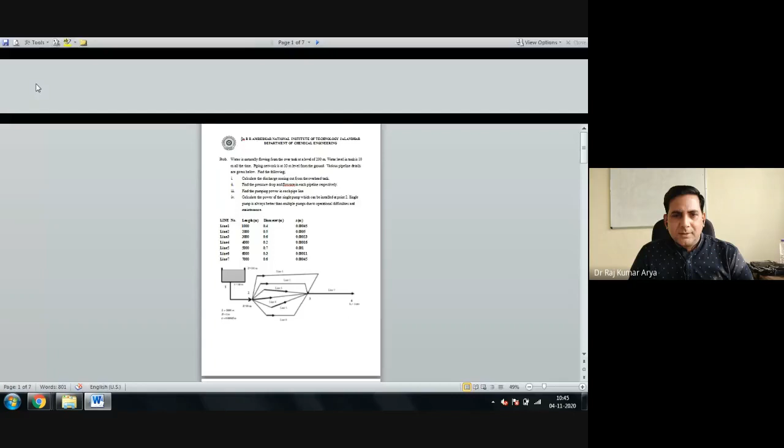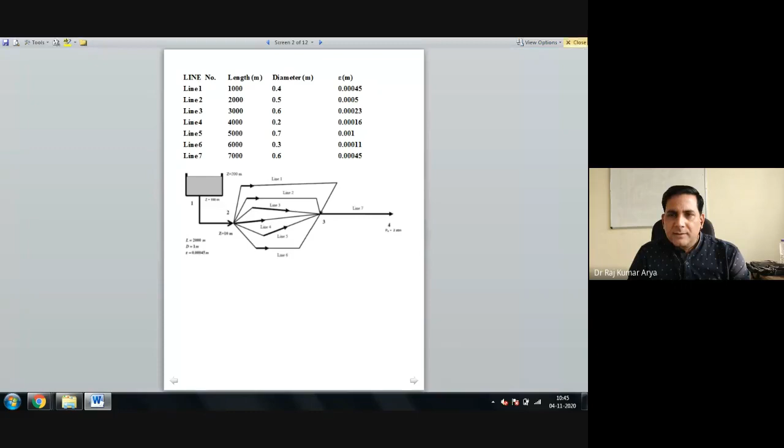Let me zoom it. So you have a similar problem as you did previously. Can we write the equation for that?

You wrote previously your Bernoulli equations for your previous problem, yes or no? Yes, sir. Can we write similar equations? First you should understand what it is.

It is practically your overhead tank, which is there in all municipalities, all townships, or all residential complexes, where you have a large number of houses, to avoid the pumping power. So what do you do? You have one central pump, and from there you pump the water, hold it, and store the water in the overhead tank.

And whenever you want to discharge it, you just open the valve somewhere here and there, and it will flow into the entire locality, right? So that's called a gravity distribution. So automatically, in this way, you are decreasing your pumping power only. You need not run the pump throughout the day. You just fill up the tank and then you can rest for some time.

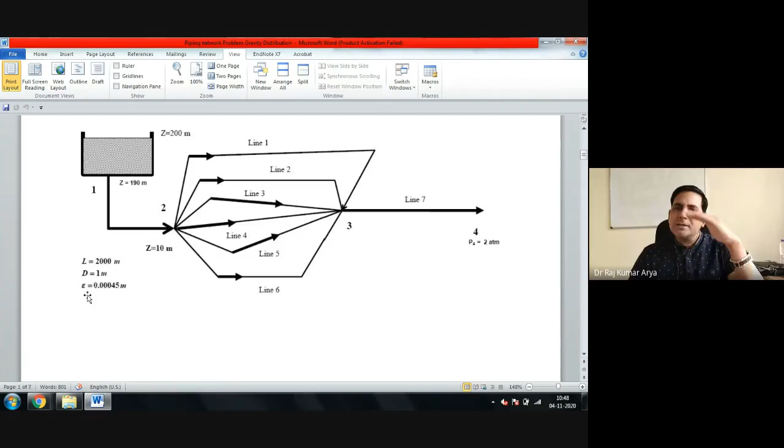Roughness of the pipe is epsilon, the roughness of the pipe, because each material has some sort of roughness. So the roughness is calculated in terms of height. So roughness is given to you, for each pipe.

These are the details of each pipeline: line 1, line 2, line 3, line 4, line 5, line 6, line 7. And these are the corresponding lengths of the pipes in meters. Diameters are given, roughness is given, because pipe materials are different or some may get corroded over time. These are the existing roughness values of the pipes.

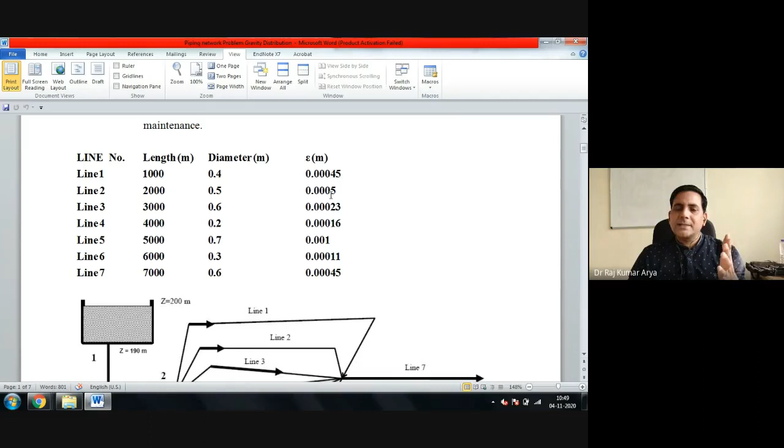Excuse me sir, what exactly is the roughness of the pipe? Roughness means - as you might have seen a pipe, outside you will find a very smooth surface, yes or no? Inside - yes sir, if you put a finger, you will find it rough.

Pipes are constructed using blowing or casting techniques. Inside, most of the time we don't care much, or sometimes we make the inside smooth - just like the cylinder or combustion chamber of your bike or vehicle, the inside is also smooth, right? Because if it were rough, your piston would not move, correct? Yes, but sir...

Even if you can keep on filing it, making it smooth and smooth, there is some extent beyond which you cannot smoothen it further. Any object, if you want to make it smooth more and more, after some time you cannot do it.

If you see with the microscope properly, you will see the surface is not 100% flat. It has some zigzag shape. Some roughness you can see with naked eyes, some only with the help of an electron microscope. You cannot see it from the naked eye or by touching with hands. That wavy nature, how much height is there vertically up and down, that is called the roughness actually. It is measured in terms of meters, centimeters or mm.

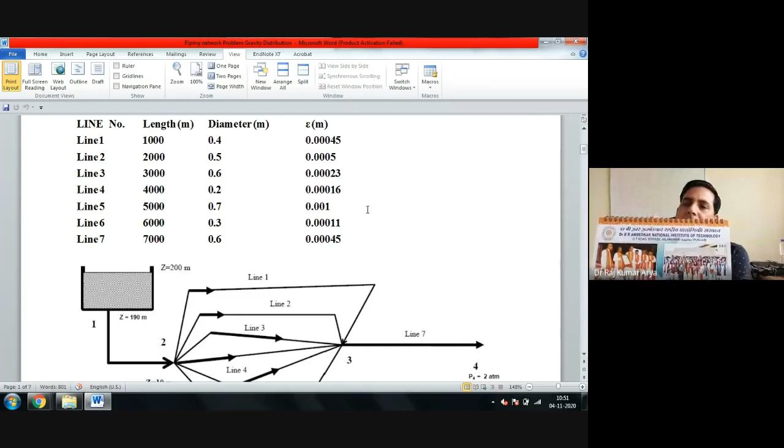So same type of thing would be there on the surface also, not in this exact pattern, maybe a different pattern. So all particles, some may be slightly up, some may be down, because that is a design problem. Sir, the roughness is there for the resistance of the water flowing through it. Yeah, I am coming to that only.

So roughness is practically unwanted. In case of flowing of the fluid, we don't want it. Just like your body, you want to move your hand freely. If your hand is rough, you cannot move it freely. Unnecessarily you are putting more energy. Yes or no? Yes, sir.

So to decrease the roughness, what do you do? You put oil, you put balm, you put cream. So the roughness of the surface, you have just covered it with the help of oil or a film, so that it has become smooth now. So in case of flowing of fluid, practically roughness is unwanted. You are not interested in that, because somehow that is not in your hands.

You cannot go beyond that particular limit. You can do filing, you can do sandpaper, but unnecessarily you are putting more power, more resources just to make it smooth. However, if you calculate in the long run, the manufacturing cost of that smooth pipe would be more as compared to my pumping cost.

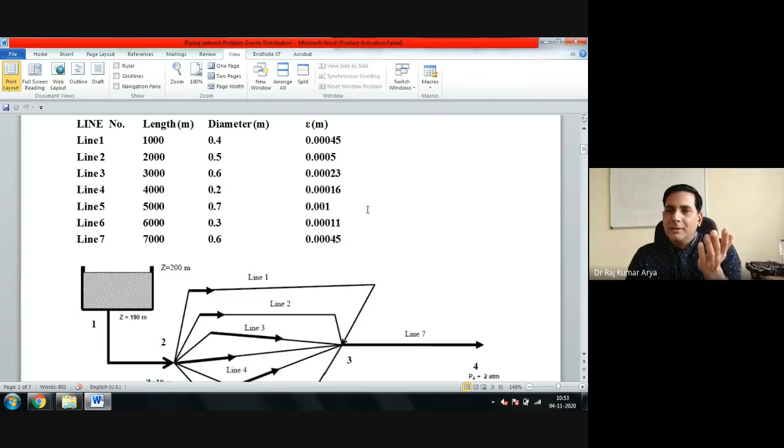So the roughness is practically unwanted in case of flowing of fluid. But in case of heat transfer, it is wanted because it will create turbulence. Turbulence means better mixing. So from a chemical engineering, reaction engineering, mass transfer or heat transfer point of view, you want roughness, you want turbulence, more and more mixing.

But in case of fluid flow, you are not interested in that, because your pumping cost will go up as you get more losses. It will create obstruction to the flow of the fluid, and finally your pumping power, some part of that power would be consumed just to overcome those obstructions. Okay, is that fine now?

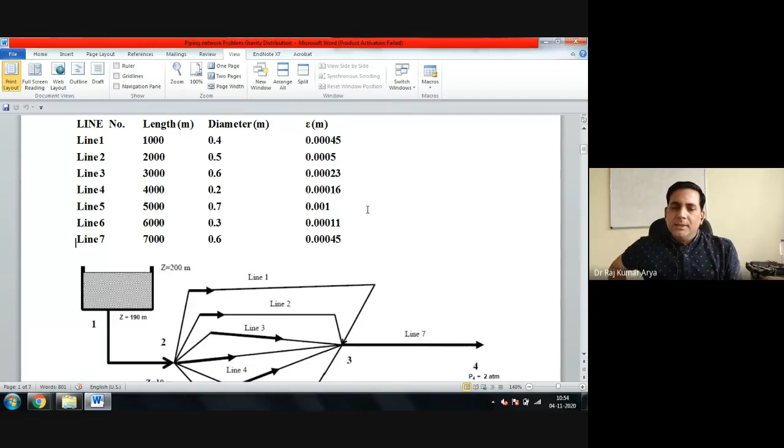Yes sir. Right, now you have these many pipelines, so can we write Bernoulli equations for all of these pipelines? One of the pipelines is from point 1 to point 2. This is one section having length 2000 meters, diameter 1 meter, and you have the roughness. So here you will have some friction losses.

Previously in the previous problem, you had neglected the friction losses. Here you would have it because now the pipes are rough. So one equation for that, because in the previous one you had not considered your minor losses, you had not considered your major losses. You had just considered the Bernoulli equation, an ideal condition. Here we are talking slightly non-ideal, so we will consider the loss term also.

Now, then you have pipeline 1, so you can write another equation for line 1, another equation for line 2, another equation for line 3, another equation for line 4, line 5, line 6. So we can write 6 Bernoulli equations, or 6 energy equations, for line 1, line 2, line 3, line 4, line 5, line 6. We can write that. Yes sir, right?

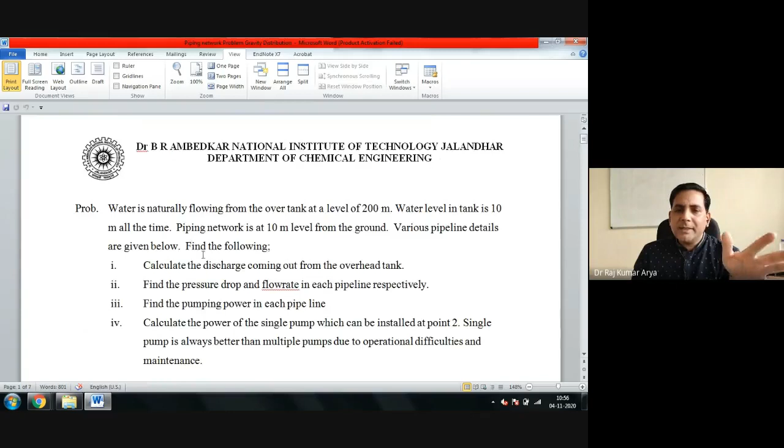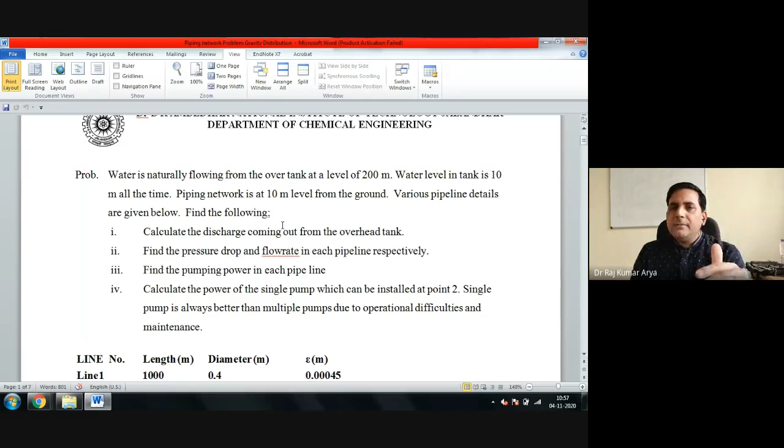Various pipeline details are given to you. You are supposed to calculate the discharge coming out from the overhead tank first. So what should be the discharge from the overhead tank? Is there any way that I can calculate the discharge from the overhead tank, how much flow rate is coming from this particular tank? Any means we can use to calculate it?

Or, what should be the maximum possible discharge for this particular flow? Finally everything is going to this particular end, right? So what could be the maximum discharge? Can we calculate it somehow?

So we can apply Bernoulli's equation at point 1 and 2 to find the value of V2, and then we can apply the formula Q equals A into V2 to find out the maximum discharge. That is the maximum theoretical possible discharge. Okay, we can do that.

We can apply the energy equation at a point. You just take the free surface here, at this particular point, and one at point number 4, neglecting all the losses.

So can we quickly calculate that, what would come here? Let's write the energy equation: P1 upon rho g plus V1 square upon 2g plus Z1 equals P2 upon rho g plus V2 square upon 2g plus Z2, plus the losses, FL upon D V square upon 2g for straight pipe. In case of fitting, this FL upon D would be changed by K, the fitting loss coefficient. In case of pipe, it remains as it is.

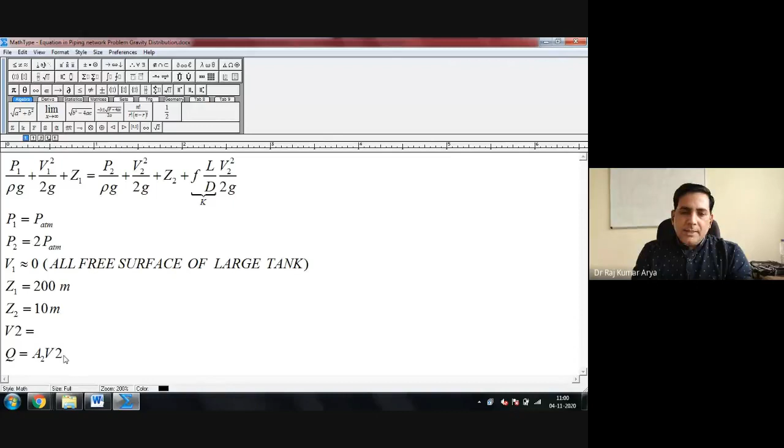Yes sir. Right, so this way you can calculate your maximum flow rate. This will become clear for everyone?

Can you quickly substitute the value and get the answer? Now, the question is: from where will this FL upon D V square upon 2G term come? So what can we do for this?

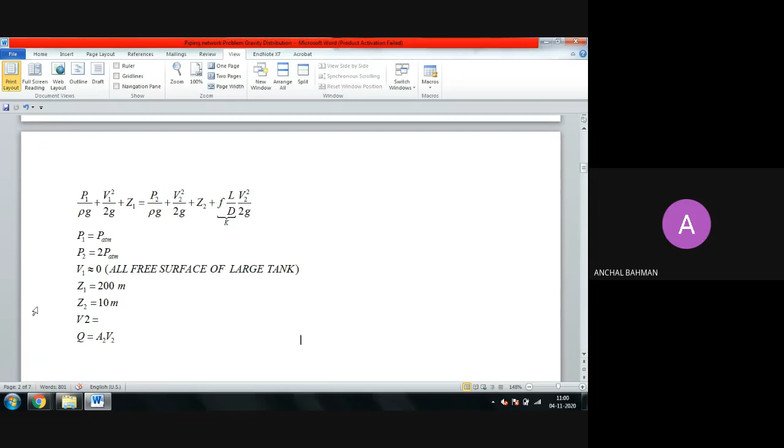Sir, if we are finding the maximum discharge, then in this case we'll neglect it. We will neglect it, so you will get the maximum value of flow rate. We can say there are no head losses in this case, so this is just a program here.

If you just calculate here, I get this value as 20 meter cube per second. This is my theoretical value. This is my maximum theoretical value.

If you substitute the values in all of this, this term is zero, and P1 is P atmosphere. So if you calculate and substitute here, you will get the maximum value of Q. That is the maximum discharge. The actual one we have to calculate separately.

Now, can we write equations for each pipe? One for point 1 to point 2, then for the entire pipeline. Can all of you write the equations for all these pipelines? Yes sir, so write them up. I can also show you what should come.

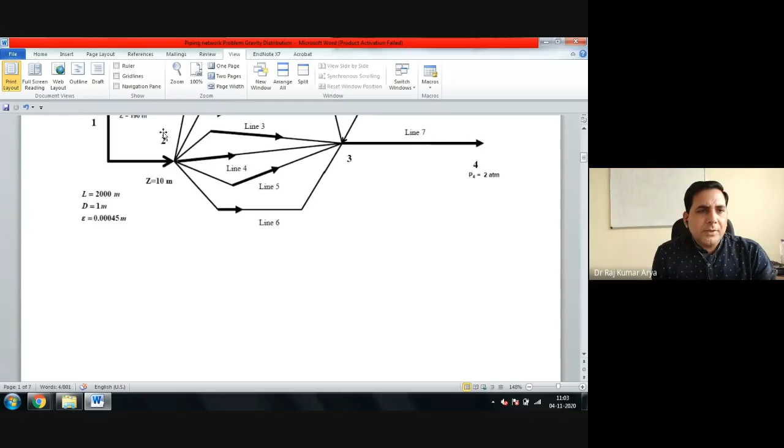I don't have that handwritten thing here. So what would be for the first one if we want to write it here? Let's say, your equations are these only, so you can rewrite that.

So all of you should write for that. Let's say for point 1, you have V1 and Z1 for point 1. We are putting this for point 1, not for the top surface now. So point 1, point 2 is there, P2, and then you have V2, Z2 also there, and you can write this L12, length from point 1 to 2. This is your D12, diameter from point 1 to 2. And this you can write V12 because you are talking about velocity in pipeline 1 to 2.

So Z1 is, how much is Z1? Do you know? Is it 190? And Z2 is, yes, what sir? 10. Yes, Z1 is 190, right?

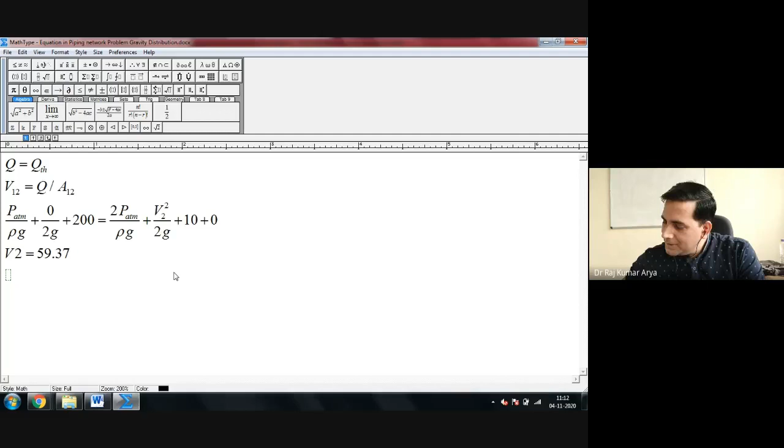It could be 59.37. What about the means of the others? How much is it for all? Yes, sir, same error. Okay, fine, no problem. So you got V2.

So you multiply here, and that will be your answer, whatever it comes out to be. Multiply your pi, and then you have D as 0.6, and then you have 0.6 by 2 as your radius, and just take the square of that only. Just do that, whatever answer you get.

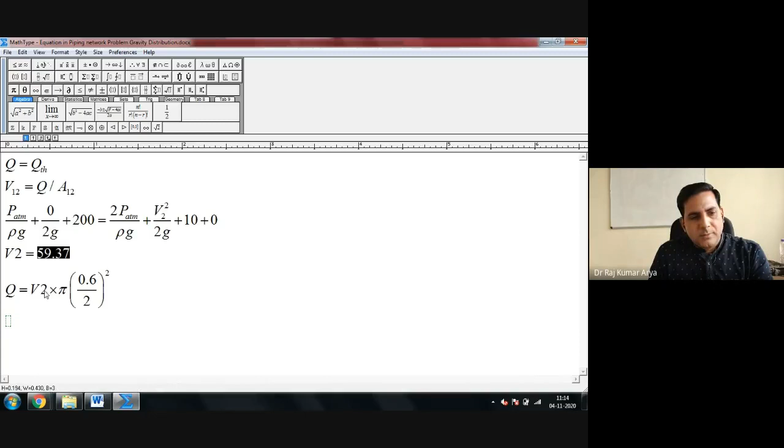Okay, so you will get your Q, and V2 is from here. So whatever it would be, that would be your Q only, right? Okay, so how much is coming?

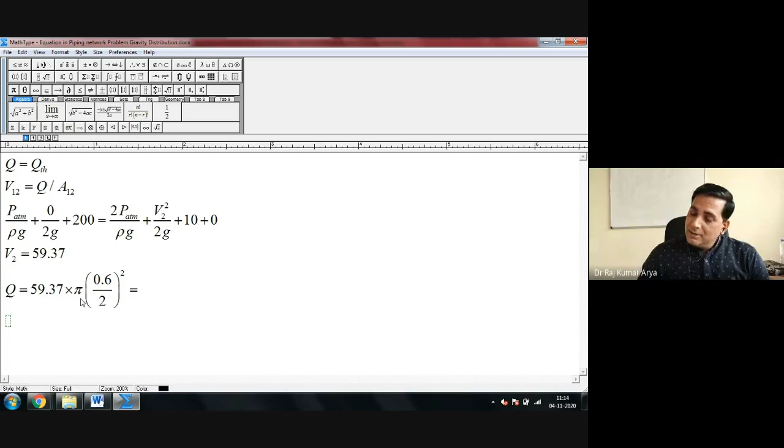Sir, how much- 1 to 2 diameter is 1. No, but we are calculating this at the exit point. At the exit point, the diameter is 0.6 meter, point number 4. Diameter for point number 4, where the pressure was 2 atmosphere, the diameter is 0.6 meter.

So just multiply this. How much is coming? Sir, 16.78. 16.78. Okay. Anyone else?

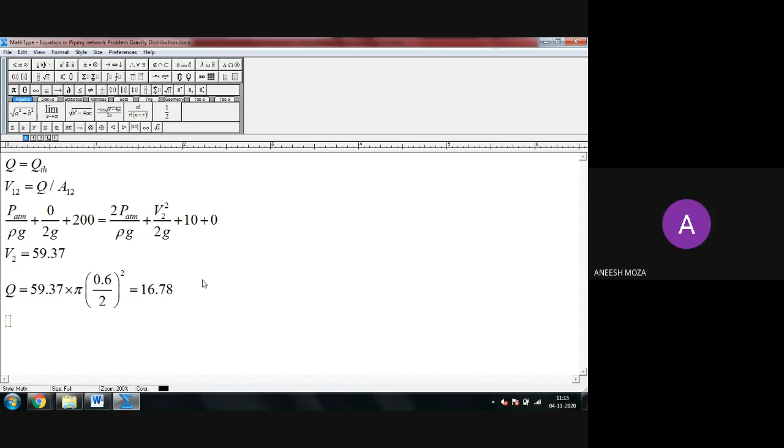Excuse me, sir, your voice as well as your presentation is lagging. What about others? Are you people also facing the same problem as she is facing? Yes, sir, yes, sir. In some time your voice is lagging, and also the presentation you are showing is lagging.

For the safer side, I do two things. I connect from the laptop from where I do the presentation, and I check it from my mobile where I can see it. So this lagging now would be from your side, because if I am just checking from one place, it might be the problem from my side. But if it is lagging for me at another place too, then it's fine, okay. I always do it that way, I share the presentation from the laptop and I listen to everything from my mobile. So it means if things are coming to me fine, it will come to you also if your network is fine.

Anyway, you got the flow rate, 16.78. Yes, sir. Okay, yes, sir. So now you got the flow rates.

Now let's come back to your pipeline 1, 2. So you will use your energy equation there. You can calculate your velocity, you can calculate P1 at point 1, or what else can be done? What else can be done? Anything else?

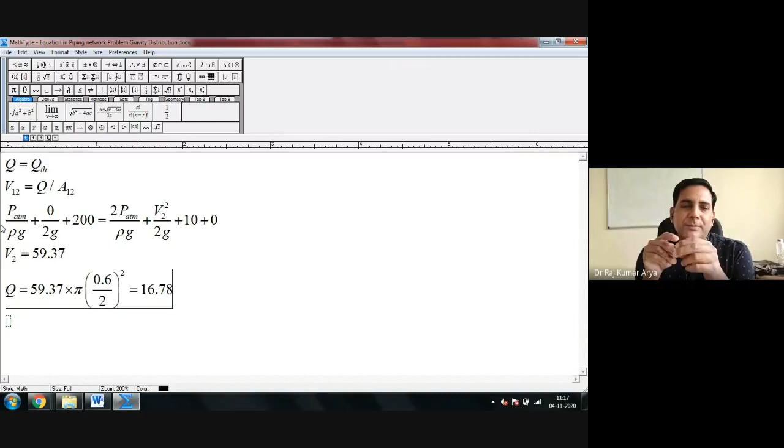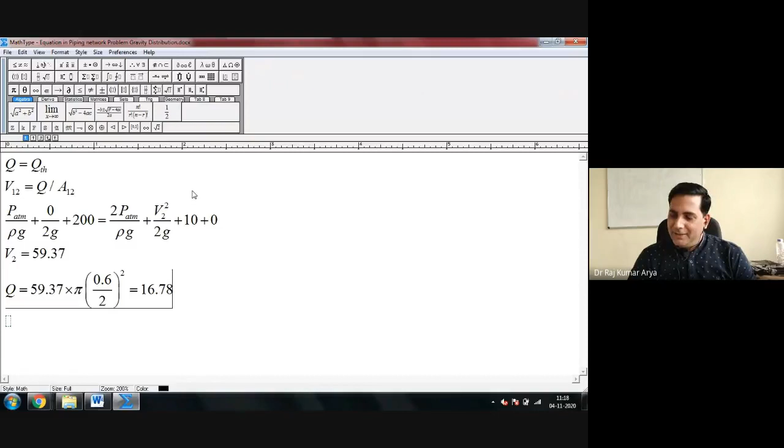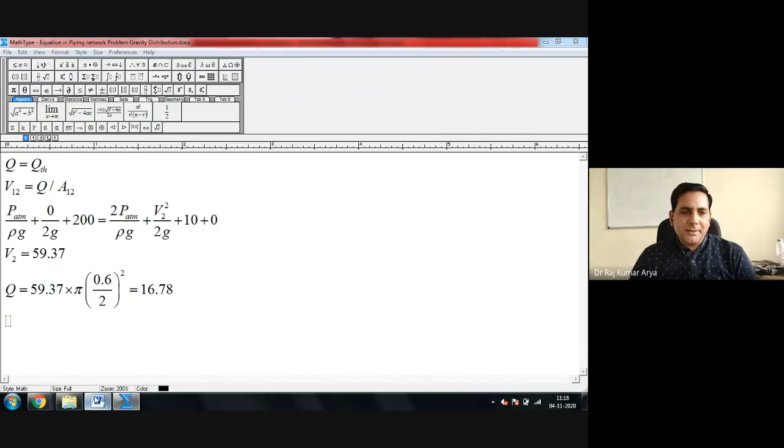So there are two ways: if you will just keep your pressure at point 2, let's say that pressure here, this one. So suppose you don't know the pressure here, so you will have one more variable for that. And the same thing here also, you will have one more variable for the pressure here, correct? Yes, sir, so we will have two more unknowns.

So suppose for the primary calculation for this, we are just considering that throughout the pipeline your pressure is the same, as in there is no change in pressure variation. Practically this is actually a very rough, crude estimate. Generally this doesn't happen, pressure always drops due to the losses there. Suppose it's not there, we can say only losses are due to friction, and somehow you are maintaining the pressure inside the pipeline is same as this pressure, 2 atmosphere.

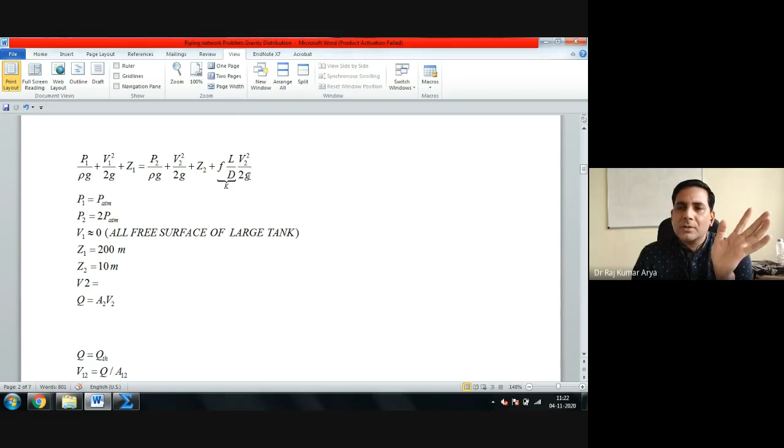Yes sir, yes sir, same pipeline. So your head loss, delta P by rho G, is just equal to FL upon D, V square upon 2G. That is your head loss in each of the pipelines.

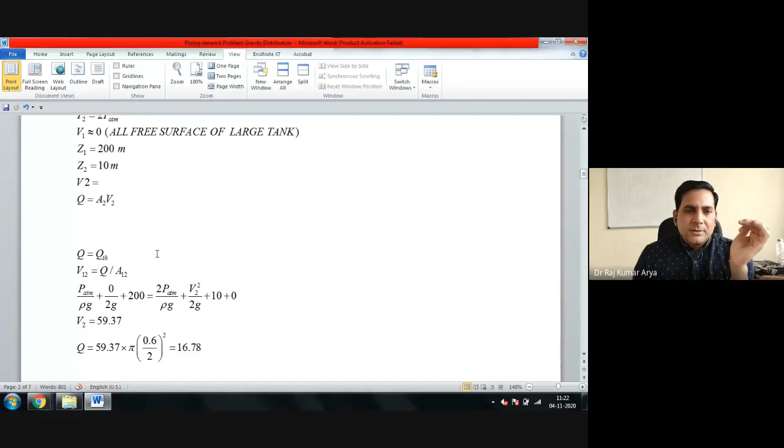So if you write this in terms of head loss, one minute. What will you write for that here? This term will get cancelled because all of them are horizontal pipelines. So on this side you get this one. And V2 is also the same because the diameter is the same. So your head loss is this only. Correct or not?

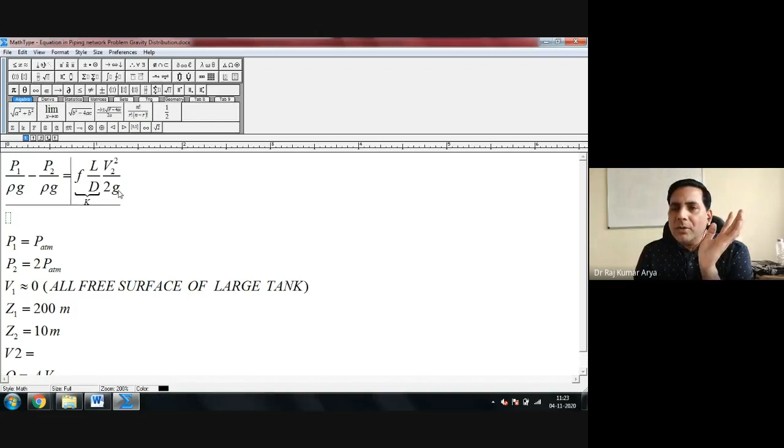Your head loss in the pipeline is FL upon D, V square upon 2G, sir. Yeah, tell me, I want something from your side. Yes sir, you got this.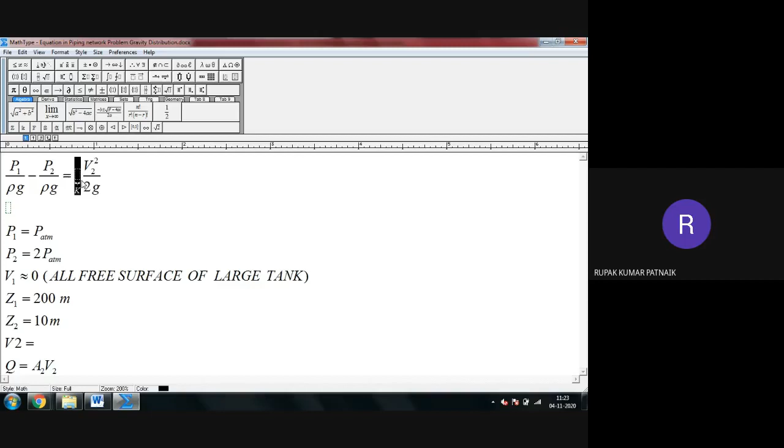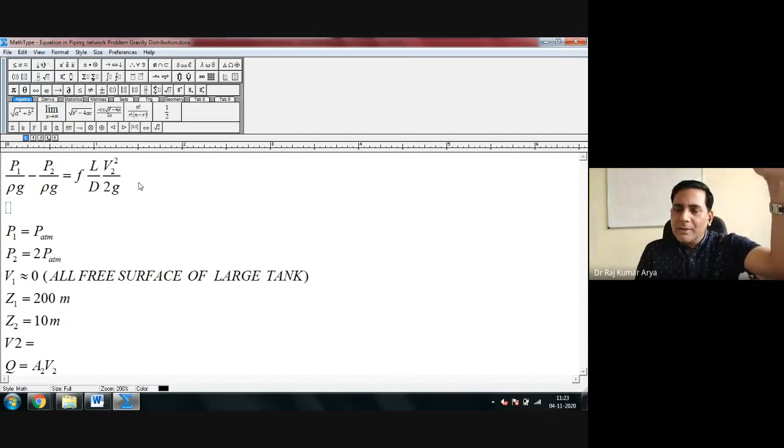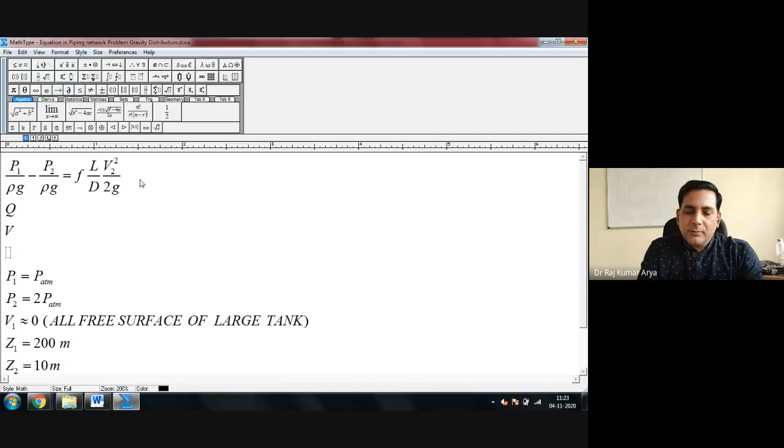Now you know the flow rate in line 1. In line 1 you know the flow rate, right? Because whatever is coming, you've taken a starting flow rate. So that gives you Q. From there you can calculate your V. V would be Q by A. Right? You'll get that? Yes sir.

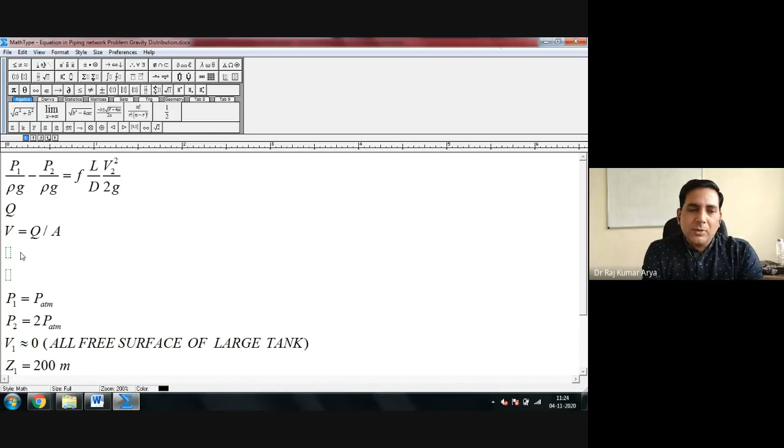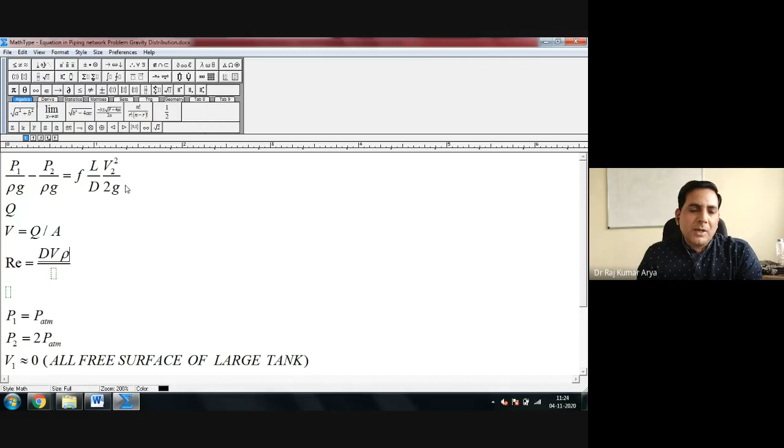After that, once you have this, there are correlations. You get velocity, now you calculate your Reynolds number. How many of you have heard this term, Reynolds number? Yes sir, we have. All of you might have heard this term, right? Reynolds number, just to identify the flow pattern, right?

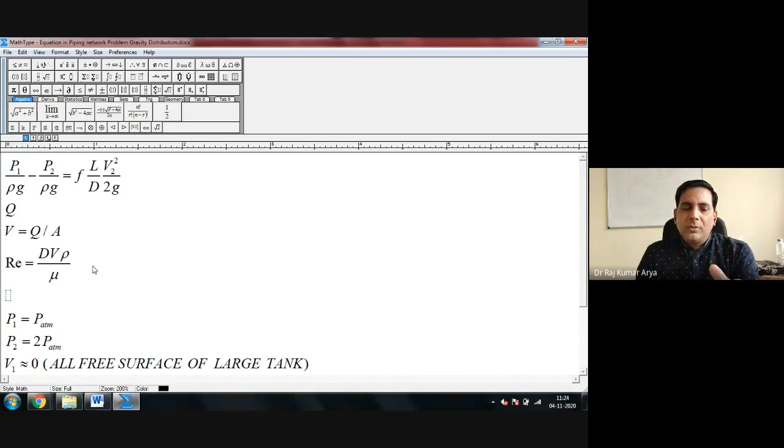Now Reynolds number is known to you. If this value, let's say your RE is less than or equal to 2300, you have a formula to calculate the friction factor. Can anyone tell? No idea. It's 64 upon RE, if RE is less than 2300, practically 2100, but 2300 is also called the range of turbulent flow, so a transition flow actually. So you can keep a cap there up to let's say 2000, 300 something.

Okay, for the rest of the cases you have another formula, another correlation to calculate the friction factor. You'll use the Haaland correlation for that. You have to search what this correlation is, I can also give it but you just search it. Haaland correlation is just to calculate friction factor again. So you'll have correlations once you get the RE, and now you have correlations just to calculate friction factors. Once you know the friction factor, come back here.

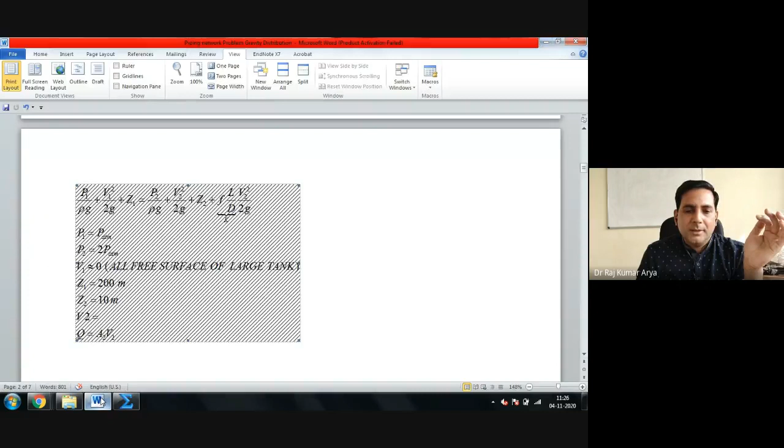You can calculate this now, correct or not? Yes sir, right? This is your pipe number 1, this is just pipe number 1 and 2. Let's see for your pipeline, your pipeline is this. This calculation happened in 1 and 2 just for the time being.

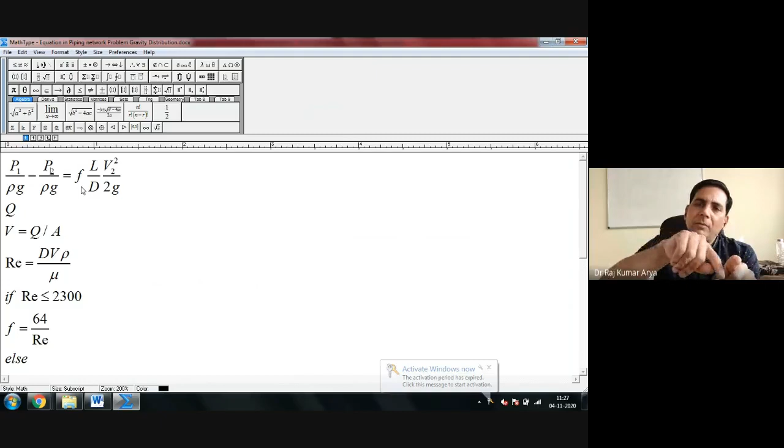Now what will happen between line 1? You will write the same pressure drop equation for line 1. So for line 1 what will you change here? If you want to write for line 1, you will write P at point number 2. Where is the exit point? Point number 3, right? Yes sir, right? Point number 3, here you will get 3. This will again become F of line 1, L of line 1, D of line 1, V of line 1. Right? That way it will change.

Correct or not? Yes sir. Fine. Now for that also you need F to be calculated. So you have some flow rate, and that flow rate now needs to be divided into these many pipelines.

Let's say some flow rate has gone to pipeline number 1, some has gone to pipeline number 2, pipeline 3, 4, 5. Let's say Q1 has gone to pipeline number 1, Q2 to pipeline number 2, Q3 to pipeline number 3, then Q4, Q5, Q6. So you have all those flow rates. Your total Q was how much? Just Q. So your Q equals Q1 plus Q2 plus Q3 plus Q4 plus Q5 plus Q6.

Correct? Yes sir, this is mass balance. What about the pressure drop? As you see for the electrical circuit, if you are talking about voltage, what would be the voltage in line 1? What would be the voltage in line 2, line 3, line 4, line 5, line 6?

Same rahega sir, voltage drop would be same. So here in case of our fluid mechanics, voltage drop is being replaced by pressure drop. So whatever pressure drop you have between point 2 to 3 from pipeline 1 should be equal to pipeline 2, pipeline 3, pipeline 4, pipeline 5, pipeline 6. So your voltage has been correlated to the pressure drop. Your current has been correlated to volumetric flow rate.

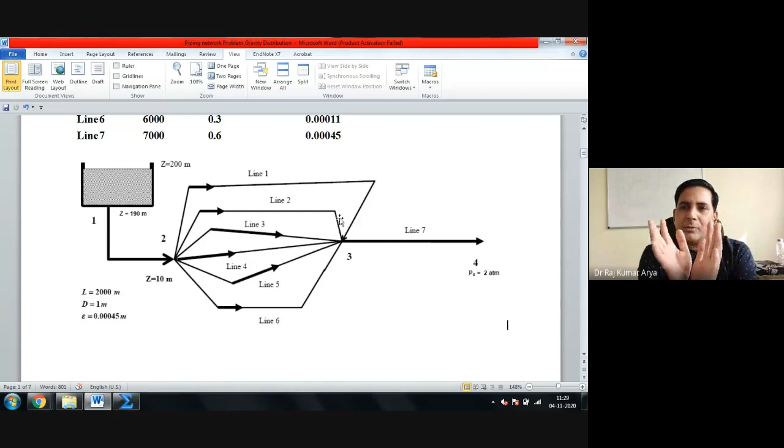So in the electrical circuit, in parallel circuit, you have I. So I would be the addition of all the currents, correct or not? Yes sir. Here you have Q. So you have to make sure that at all times when this condition is satisfied, the pressure drop in pipeline 1, pipeline 2 are equal. After that, add the flow rate you considered in the beginning. If these two are satisfied, it means whatever flow rate you have considered are correct.

So it needs a trial, it will not come in one shot, because you don't know how to divide the total flow rate. Yes or no? Yes sir. Correct? So your calculation would start here only. First you have to balance these pressure drop calculations in these pipelines, that should be equated.

So these would be your if loops actually in that case. So now first you write your equations, then you think how would I start. You have the maximum Q given, that is your starting guess, that from here I can start Q. Okay, that would be your starting total Q.

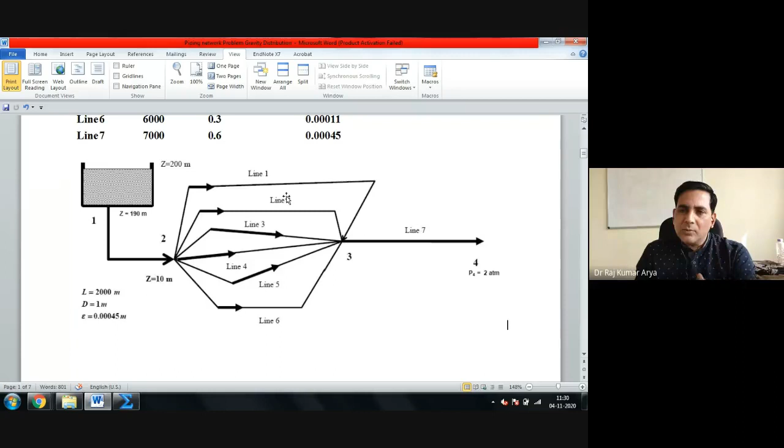Fine, yes sir. And then you have an iterative process. Okay, then I will change the Q to a different value, again different value, and I will keep on continuing till my pressure drop calculations here should be equal. And then I will calculate, each time I have to calculate Q also, because total Q calculated on these pipelines should be equal to Q supplied.

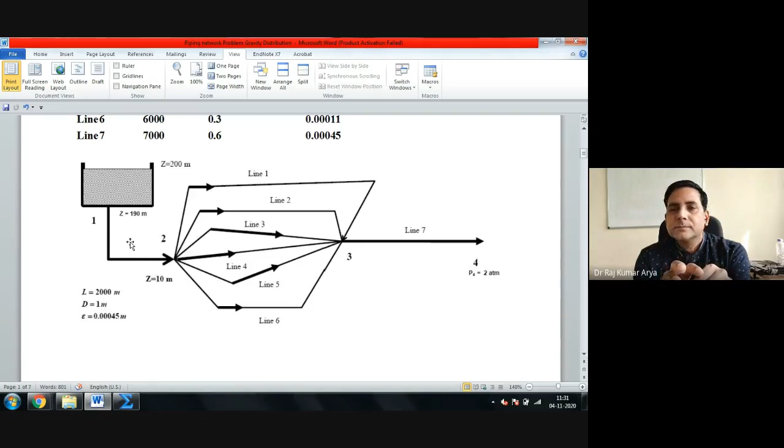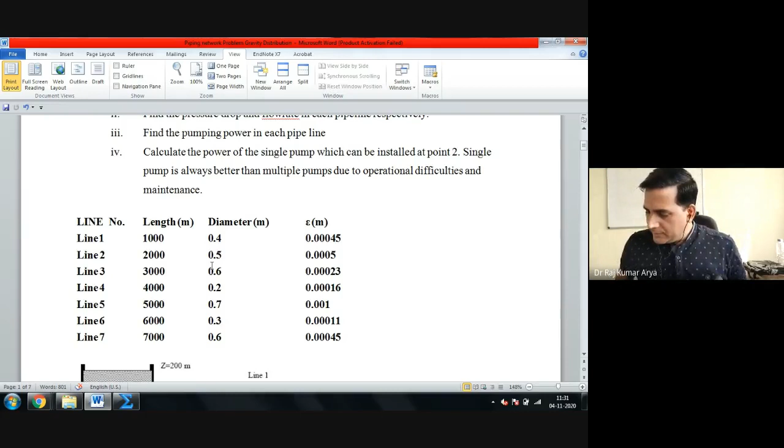Yes sir. So just think that, formulate that problem, and let's see what you are getting, and then think how can we write the program for that. Reference given to you is the Haaland correlations. If you want to write, you can write for that also, or I can provide you, or you can search it actually. Haaland correlations, that's a good one compared to the other correlations for friction factors.

Just think it, how would you proceed? This is the iterative process, think it actually. And that way you would become at least, I will say, in good shape that you can solve any pipeline problem. You have two types of problems: one is the previous one, other one is this, the designing of the pipeline.